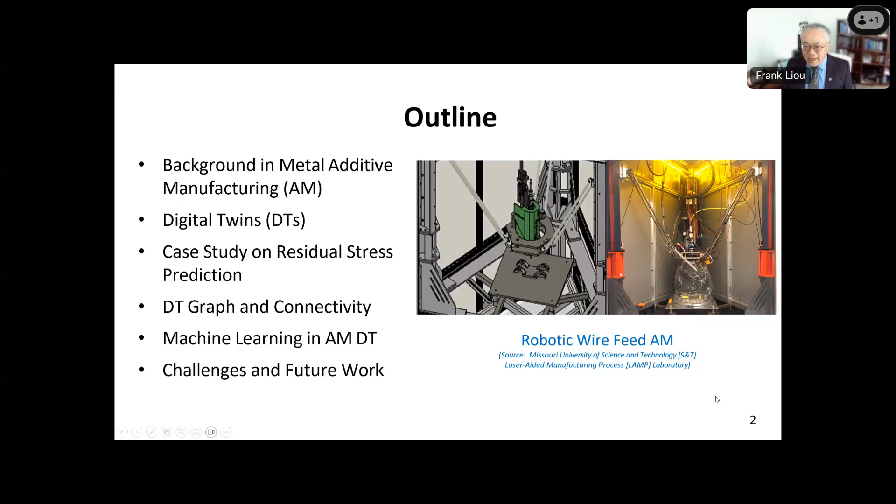By the way, in our lab we are actually building our own system. What you're seeing here is a robotic wire feed additive manufacturing system. Our lab is also called LAMP lab, laser aided manufacturing process. The machine here is also designed and fabricated by ourselves, sponsored by the National Science Foundation. We call it advanced materials and manufacturing, additive manufacturing process.

So this is a powder-based system. We have been working on metal AM research since 1997.

We specialize in custom AM system and component design and integration, especially in hybrid system integration and process planning. For example, we're working with partners like Pine and Siemens to develop their NX additive manufacturing process, hybrid manufacturing. We also work with DMG Mori to commercialize their first DED system. And of course on repair and monitoring and controls, part characterizations, and digital twin for additive manufacturing processes, and digital factories.

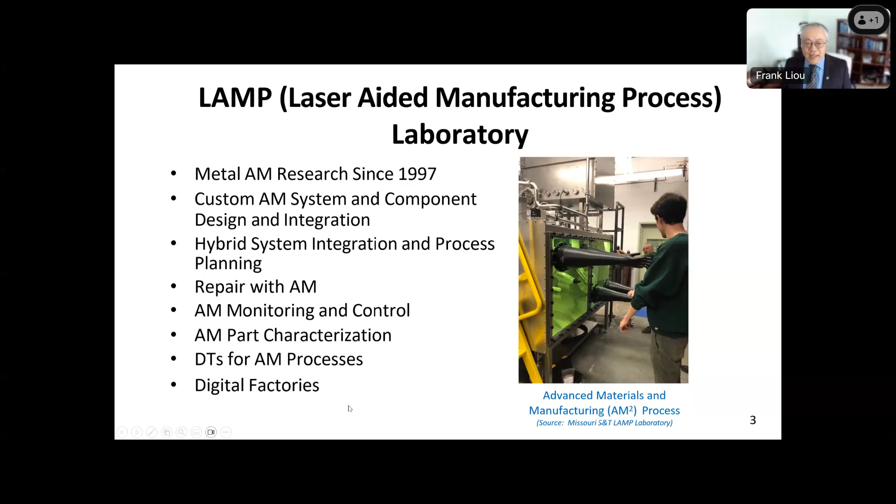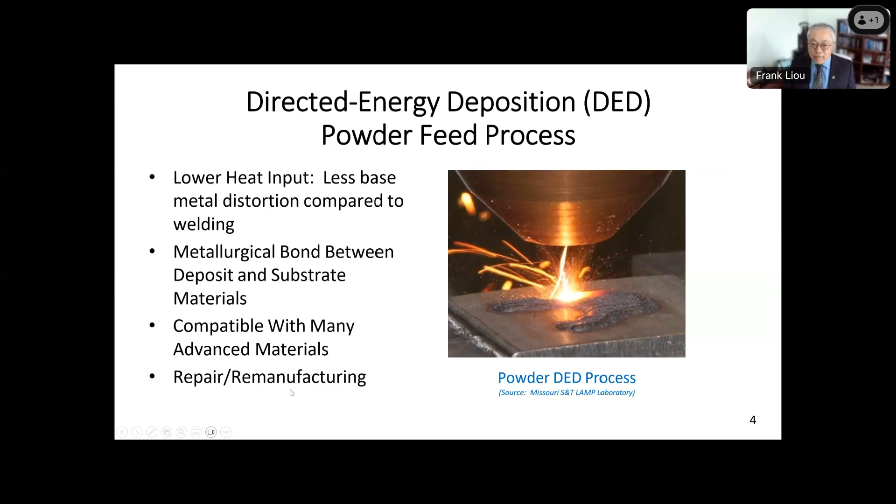The focus I'm going to talk about is more on DED, directed energy deposition powder feed system. DED's general characteristics are that it's laser based, so it has low heat input, and less base material distortion in terms of residual stress compared to welding. There's also a very good metallurgical bond between the deposit and substrate materials, and it's compatible with many advanced materials. So it's especially good in terms of repair and remanufacturing.

This was actually one of our first systems where we developed a process plan. Starting from a CAD model, it will automatically generate the tool paths for deposition and for machining. That's the hybrid process.

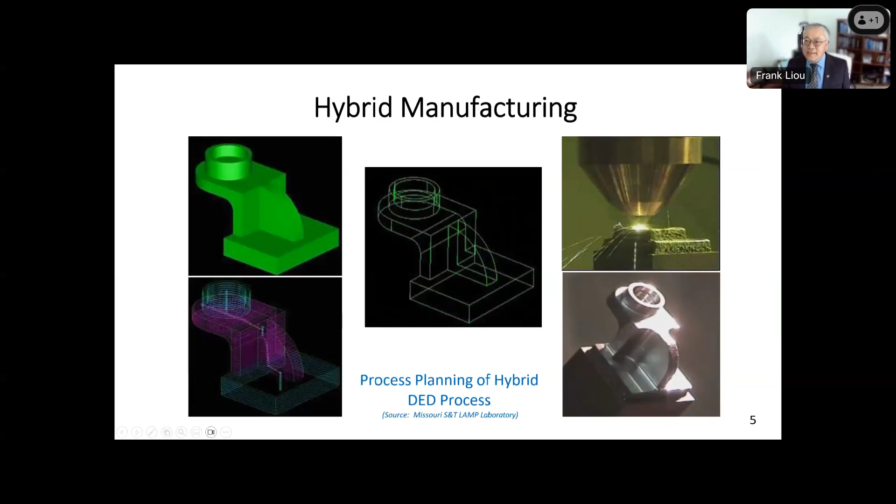Metal AM has emerged as a disruptive digital manufacturing technology. However, it still has a lot of issues. For example, in terms of geometry, for traditional manufacturing methods, you probably don't worry too much about the material composition at different locations. There are still some issues, but for metal additive, this is especially an issue.

For example, if we are trying to make a consistent microstructure, the first layer condition is very different, and could be different than the second layer, and different than the third layer, and so on. Because of that, it's kind of geometry dependent and material dependent, and then we try to avoid defects like residual stress. So there are a lot of issues.

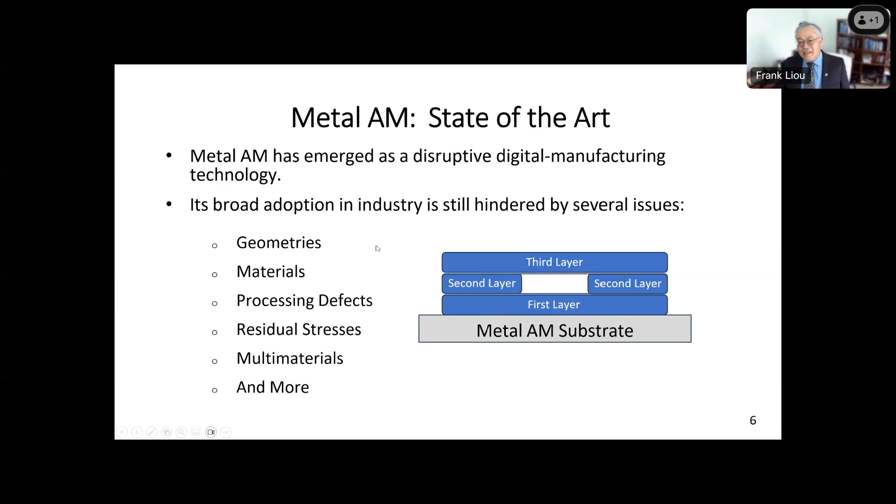The one good thing about metal additive is the DED process: you can make multi materials, for example functionally graded materials. So anyway, if it's a function of geometry, then it's not good news, because then it's very complicated. So we try to see if we can resolve these issues.

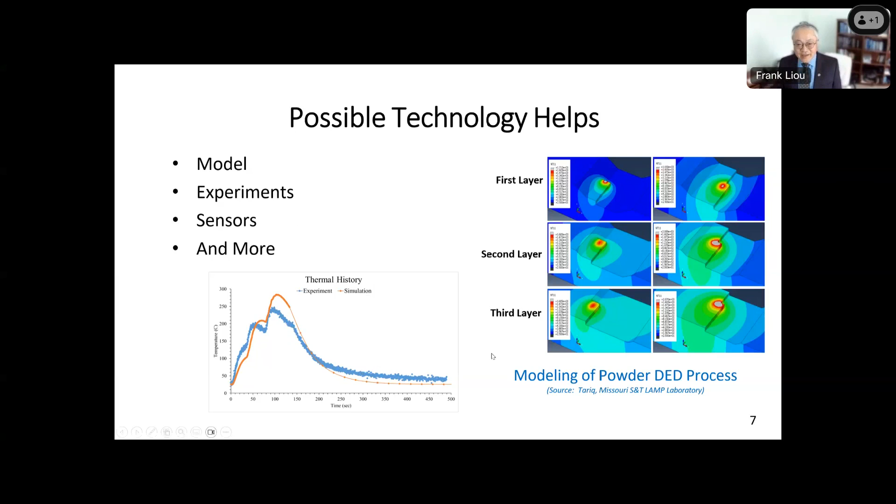Probably process modeling is the first step, trying to model what's going on. As you can see, this is just one example to show the comparison between experiment and simulation. We try to use experiments and sensors to capture whether or not the temperature history from simulation is consistent with the experiment. Because we do this quite a lot, when I first saw digital twins - since you need a model and you need sensors - I thought, hey, we actually can do a digital twin for this.

So this is some kind of snapshot of our system here. So what is a digital twin? A digital twin is a virtual representation of a process that spans its life cycle. It's not only one case of model and validate - it's updated from real-time data and history, and uses process modeling, machine learning, and reasoning to help decision making. For example, this is our AM system, and this is the model.

We probably have some kind of sensor to get the data so we can improve the model and the process. Some of the process, like microstructure, happens after fabrication, so that's offline. Even offline data, like cracks or successful parameters, can be included into the digital twin. We try to use machine learning to get the data, and this process is supposed to be continuously used to improve the system.

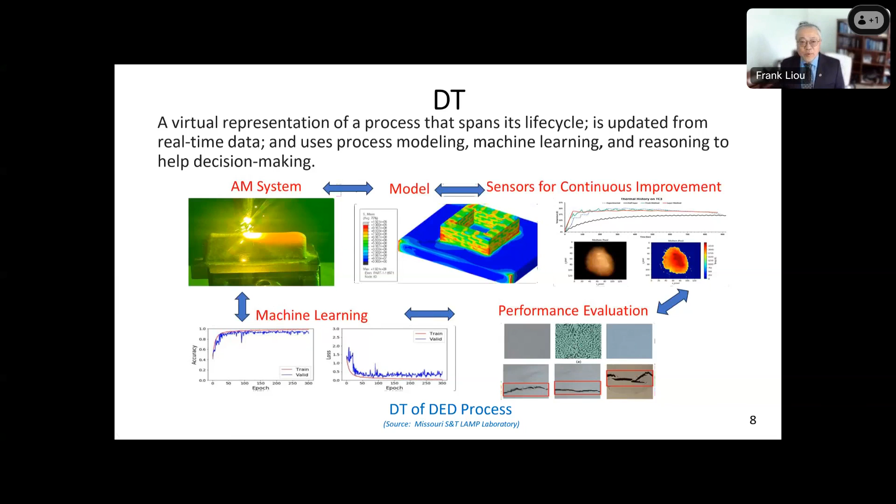So why are we using digital twins? We can use sensor data from the physical test and data from the virtual model. Those sensor and experiment data can be used to validate your model, but we try to make use of those different kinds of tests and continuously improve the system, giving insights into many critical aspects of the manufacturing process, and more importantly, getting that information quickly.

So it's a very critical tool for the most decision-making process. And if we can do that, then we can improve operational efficiency, automation of multitask, and training, validations, and the eventual goal is to achieve the so-called first-time build success.

That's why I mentioned before it could be a function of geometry. In other words, building different geometry depends on your requirements. You may have to fine-tune some of the parameters, but whenever you have a new system coming, hopefully we don't have to, or at least minimize the trial and error process, and achieve first-time success.

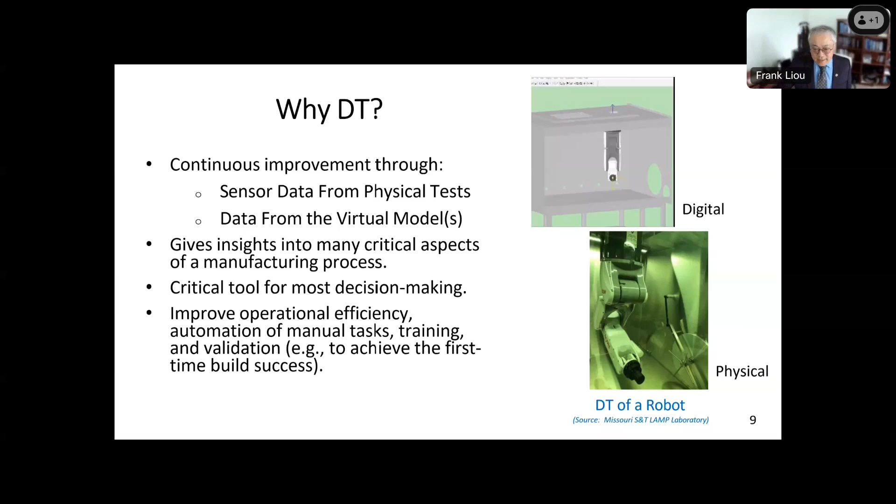I'd like to remind you that there are fundamental research gaps and future directions for digital twins, recommended by National Academies in 2024. The first recommendation is for federal agencies to launch new cross-cutting programs to advance mathematical, statistical, and computational foundations for digital twins. The second recommendation is to ensure verification, validation, and uncertainty quantification are an integral part of new digital twin programs.

This is actually from a book, but those two recommendations sometimes I feel are very important. So in our lab, this is the process controls, to give you some idea.

This is the 3D printer, the metal additive process. There's some kind of sensor, and the sensor gets the sensor data back to the control system. Normally we call that feedback control or fuzzy logic control, going into the logic controller to control the printer. However, in digital twins, there's also feed-forward control that can provide input here, and those could be from the analytical model, could be FEM model, or the integration of those - we call that a surrogate model.

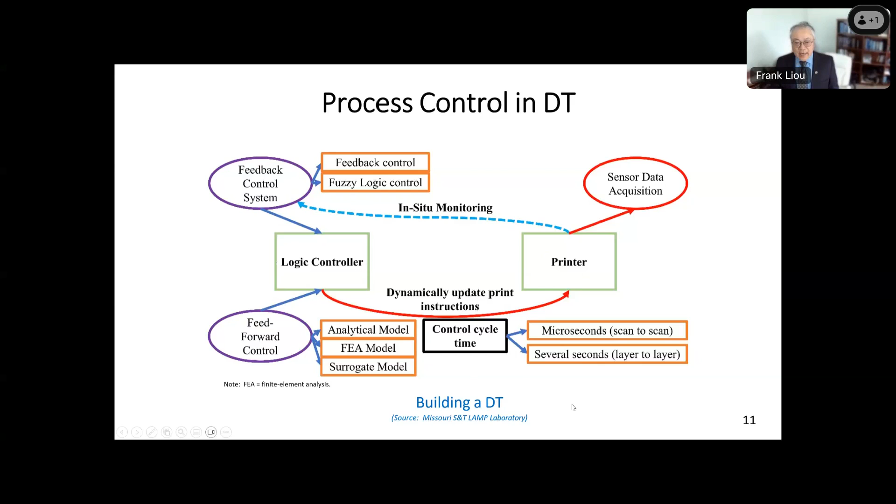If we look at the overall parameters in the DED process, for example, we have laser beam and powder beam, they interact to come up with the parts. If you look carefully, there are a lot of parameters - I just list some of those. There are 50 different process parameters. Some may be important, some may be minor, but they could all influence the final product quality. It's actually a very complicated system.

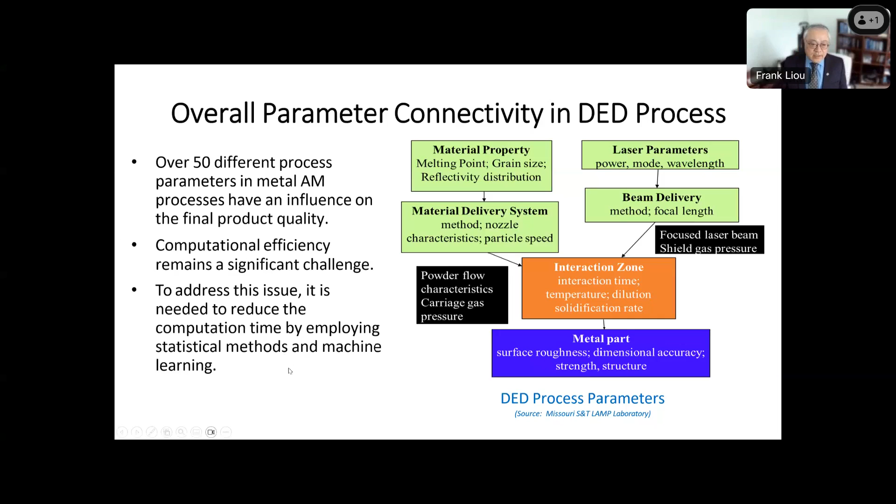So then we try to do some modeling to understand the process. However, computational efficiency is still a significant challenge because there are so many parameters. In general, the computation is kind of slow. To address these issues, we need to reduce computational time by using other different methods like machine learning, which we just talked about. In terms of the model, you can see why it's so complicated - this is for the metal AM modeling process. Before the solidification, there are powder dynamics.

Okay, we want to know what kind of powder and what kind of shield gas, and then how the powder is going to behave, whether or not they can focus into the melt pool, and laser beam interactions with the powder, and melt pool thermal fluid, and then during the solidification, the microstructure and phase transformations, and then after it's solidified, what are the residual stress and the distortion there? So each one of them could be some effort to model it.

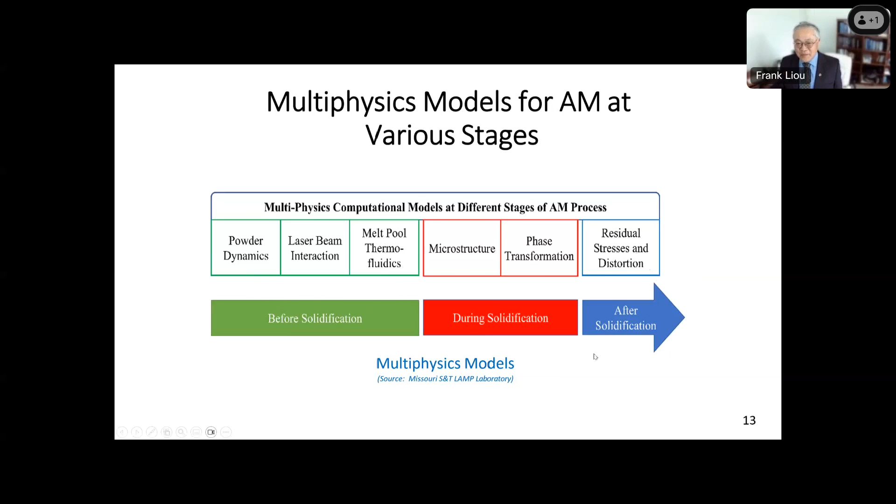So I'm going to focus on the residual stress, because during the deposition process, there is a tensile stress condition that can affect material performance, and also there is a compressive residual stress once it's cooled down. The bad news is they don't normally cancel each other out. Okay, so this is the sample I've shown here. This is just a flat plate, but we just deposit a little bit here, and you can kind of see it's distorted.

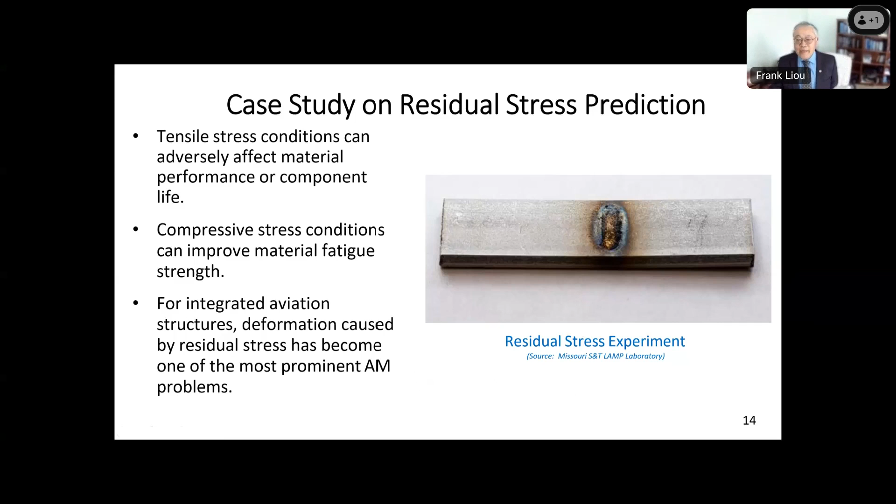If this is the case, then whenever we are trying to repair something or even deposit new parts, it's going to distort. So it depends on the application. In some cases, this is probably a big problem, to have the residual stress. That's why I use this as an example to talk about that. So we try to overcome these issues, but before we overcome it, we need to understand how that works. Let me give you one example.

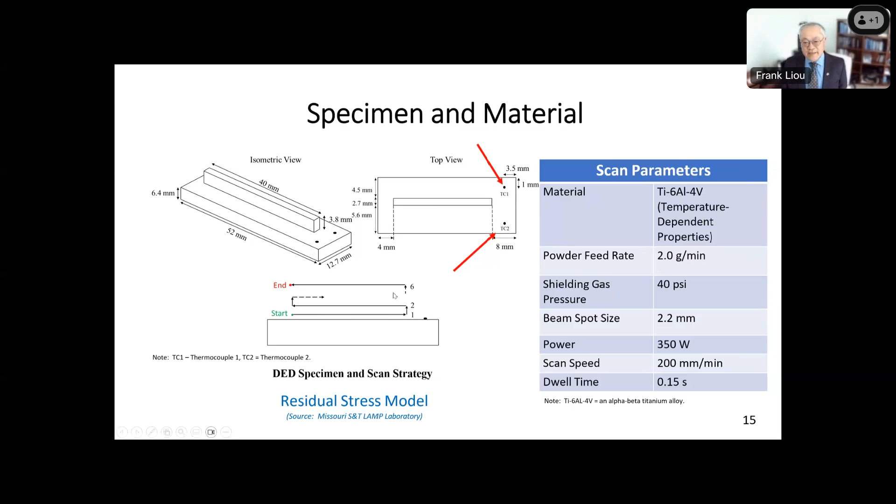So this is actually a part that we use for testing, to validate our model. This is a very simple case, just a thin wall here. And we put two thermocouples just to validate. So we try to model the entire deposition process, including those 2 points, and then see how good the model compares with experiments. In this process, we feel that the temperature is probably the most important, or at least something that we can measure. And then we deposit, in total only 6 layers, and then we see what happens.

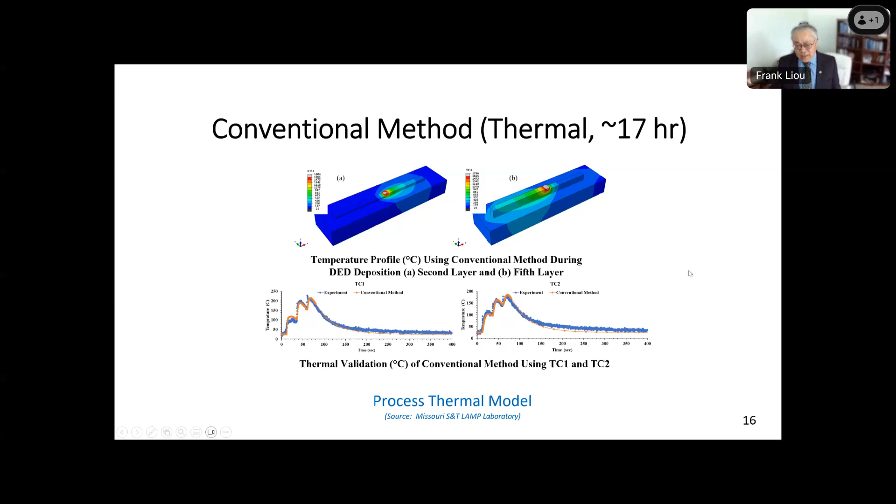So we use a conventional finite element model. And I think we probably have enough measures. So you can see it compares the experiments with the conventional method. The model with experiment fits very well. The major problem is it takes about 17 hours, on the student's computer. So because of that, we try to see if there is a way that we can reduce the computational time. On the most left-hand side is the one I just showed you, the 17 hours. And we found out there's another method called the chunk method.

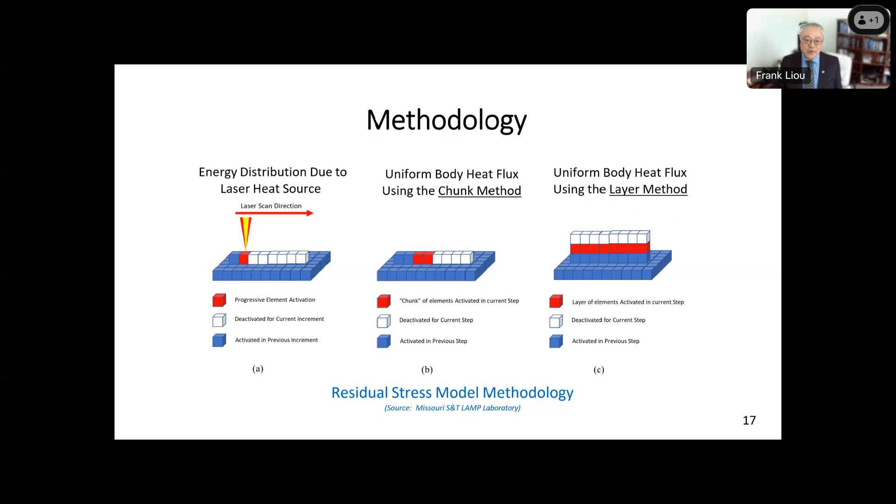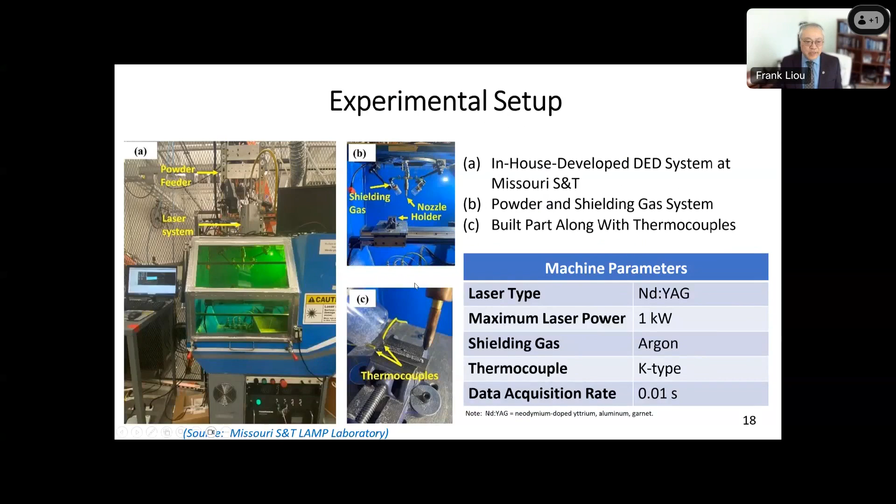The chunk method is an approach where, for example, we put 2 elements together and we call it a chunk. So in this case, we have this one chunk. We call this the chunk method. And then over here we have a so-called layer method, where we treat one layer as one element. So this is kind of an approximation, yes, we know, but we try to see how well we can accelerate, whether or not we can reduce the computational time. And then we also have experiments and thermocouples to measure it. We also have an optical camera to look at that.

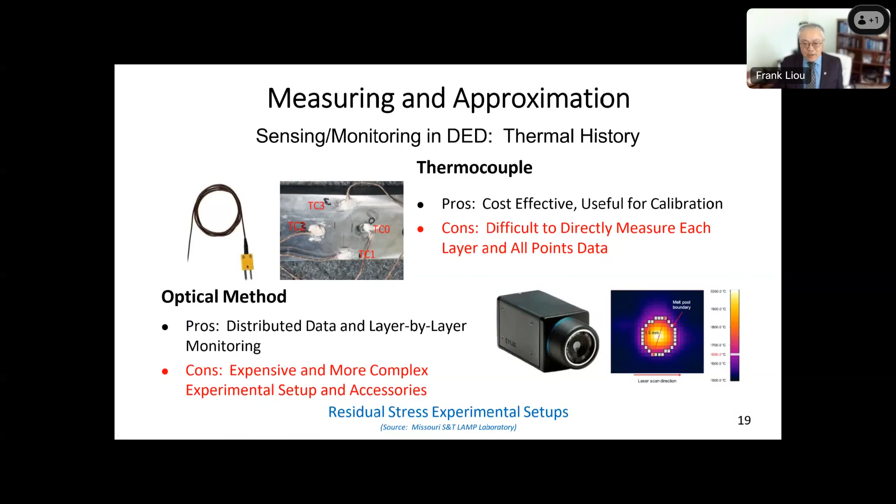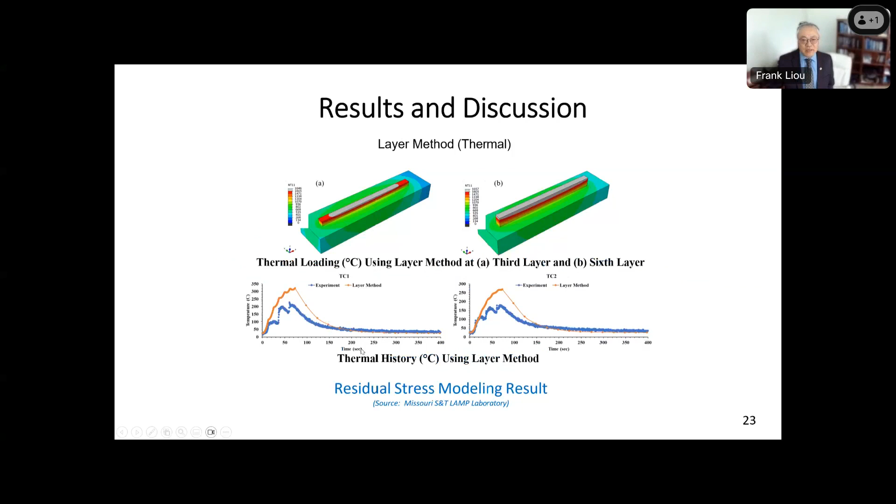And then this is the layer method. Layer method means we treat the whole layer as one element. And you can see this is even more off; you probably can only get some kind of general trends with the layer method. So this is the summary of the results. In terms of computational time, this is in minutes.

So for the traditional FEA methods, it's about 1,000 minutes. That's about 17 hours, as I mentioned before. And then this is the chunk method over here, and this is the layer method. So the layer method is 29 minutes. But as you can expect from the thermocouple, the layer method has the most errors, as expected.

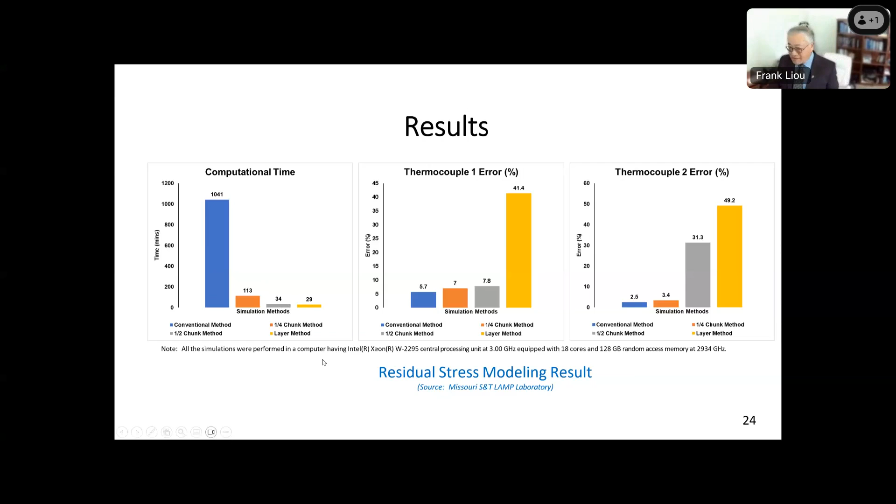Now the question is, let's say 30 minutes or so, this is supposed to be the fastest we can calculate for this case. So is 30 minutes acceptable? It depends on what you want to do. But in general, we think this is probably not sufficient, because this is a very simple case. What happens if it's a more complicated case? It would probably still take a few hours to compute.

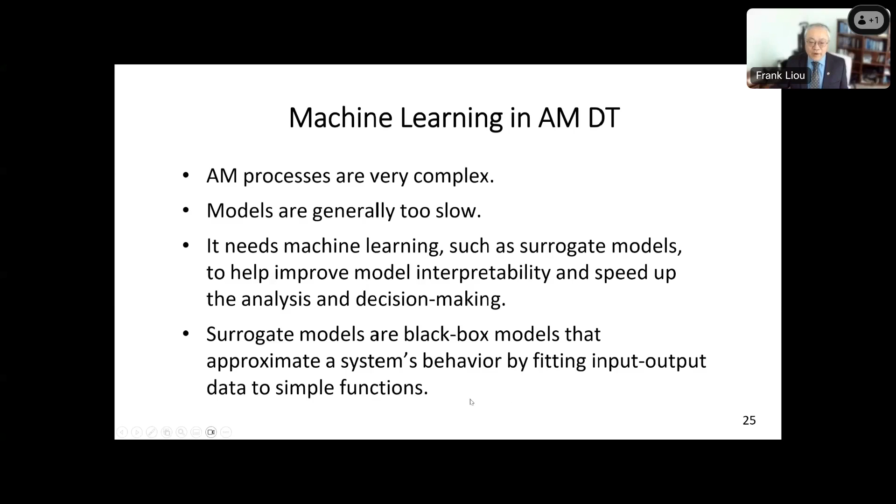So we started thinking about using machine learning here. Because those AM processes are very complicated, the model is too slow. So we try to develop a surrogate model to help. So what is a surrogate model? It's a black box model that approximates the system's behavior by fitting the input-output data to simple functions. And you could also use neural networks to get some more details there.

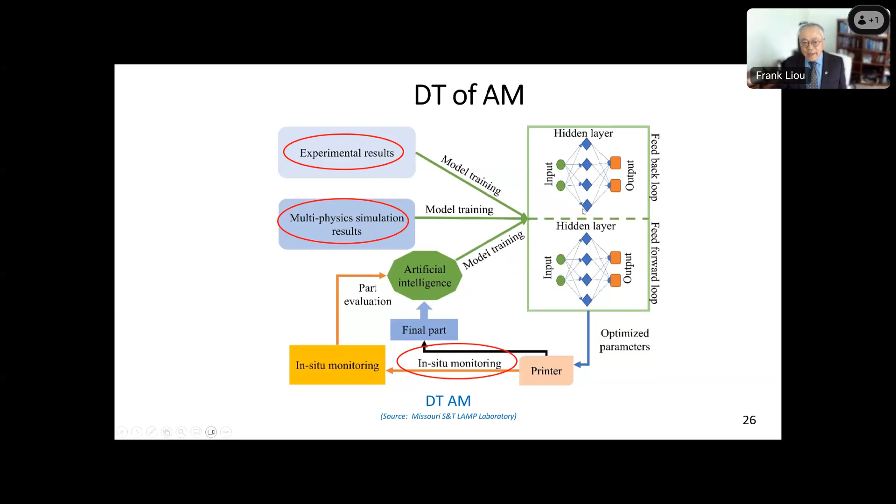So it's basically something like this. The whole thing is a digital twin system, but here this is the neural network. We feed back the data from the experiments and data from the simulations as training data into the system, and as feedback we can continue to improve the system. So this is when we developed the surrogate model.

So from the experimental data and from the modeling, we gathered those data and used them to train the surrogate models. We used actually 4 different types of neural networks, XGBoost, for example. And then we try to predict what's going on; we try to predict the temperature.

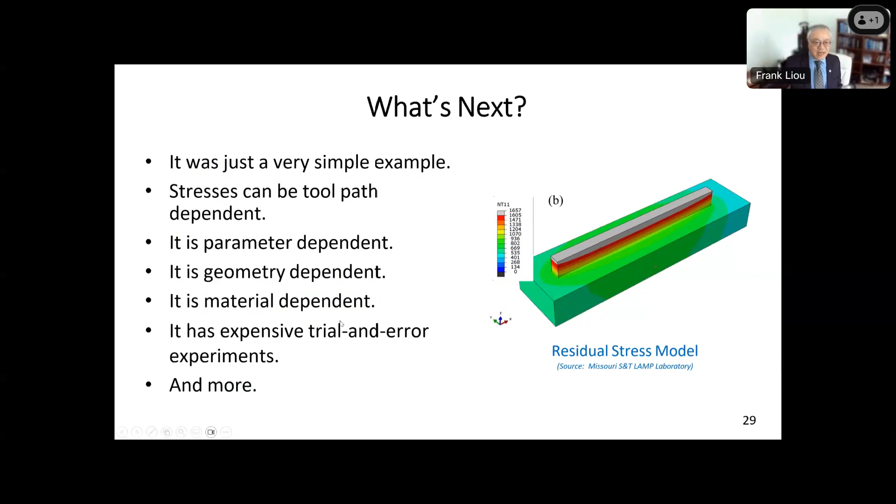So what's next? Because this is a very simple example. The stress could be toolpath dependent. It could also be parameter dependent, with a lot of parameters there. So we try to see how we go from here.

If we look at the applications in metal AM, a lot of people are interested in the microstructures and the mechanical properties and strengths, for example, tensile, fatigue, hardness, toughness, ductility. Repair and remanufacturing have their own requirements as well. And some of the digital materials, like functionally graded materials and multi-materials. So there are a lot of possible applications there.

So our approach is trying to dig into details. For example, people are interested in microstructure and mechanical properties. If that's the case, we probably need to look at some of the defect sources and, as I mentioned, dig into the details. For example, some of the parameters may be related to the equipment: issues with the laser source, printing chamber conditions, faulty coating delivery systems, or improper base plate dimensions. For example, maybe the base plate is too small, something like that.

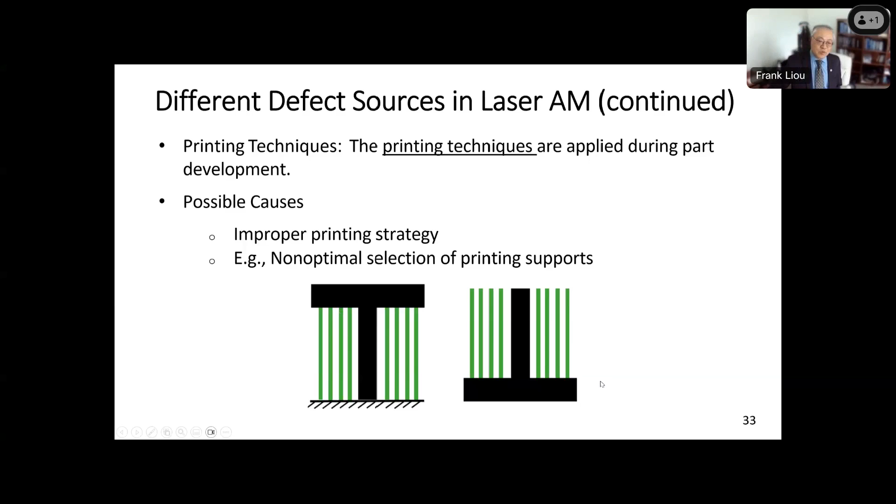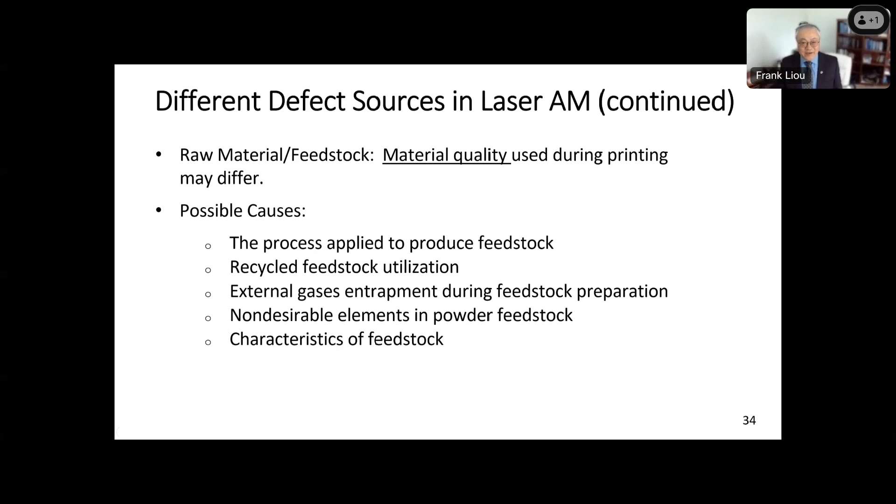And then this temperature, and as a result the cooling rate, is going to affect your microstructure. For example, if the cooling rate is high, maybe your grain size is going to be small. And your grain size is going to impact your strength, and so on. So we need this digital twin graph and the connectivities to link all the parameters of our interest together. And then from the experiments and from the simulation, we'll be able to find out the weight for different connectivities.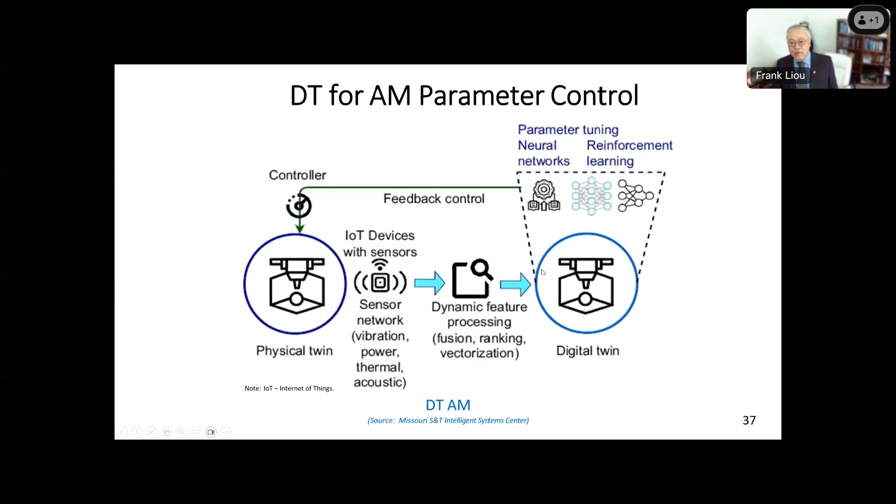So this is kind of a schematic of the system. This is the physical twin and this is the digital twin here. Physical twin means the experimental data. You probably have sensors there, so there will be sensor data coming, and after processing the data, you use that to train your digital twin.

And when we talk about the sensors here, we can also look into the sensor signatures. For example, in the melt pool, some of the melt pool parameters, the shape, temperature fields are important. Maybe there are more than that. Layer printing, shape, temperature fields, distortions, and so on, and powder streams.

So we try to identify some of the parameters we may be interested in getting, and then we will try to see if there are any sensors that can actually capture those. Some of them may be difficult, but it's okay, we do our best. For example, some people use an IR camera over here to look at the temperature of every point.

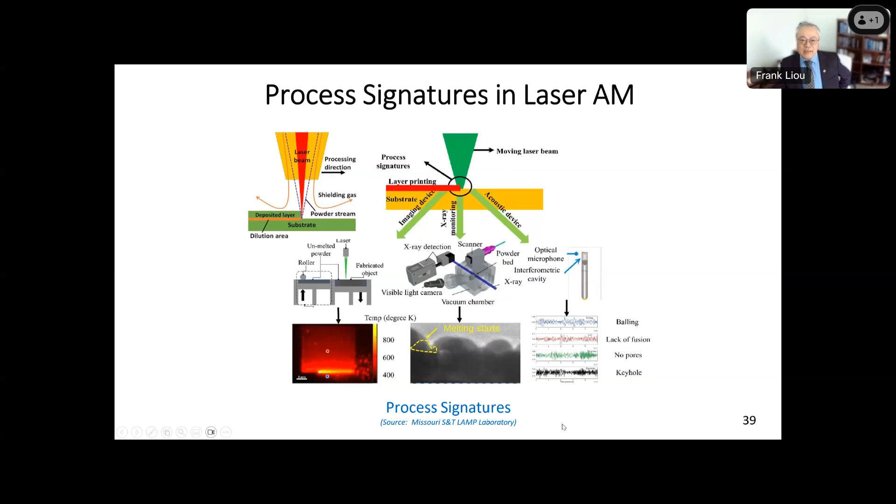And some researchers try to use X-ray monitoring, so during processing you will be able to see how the laser interacts with the powders. And if you have acoustic sensors, just from the sounds, you probably can identify that balling happened or lack of fusion happened, something like that. In other words, we try to connect those sensors with the signatures we just identified.

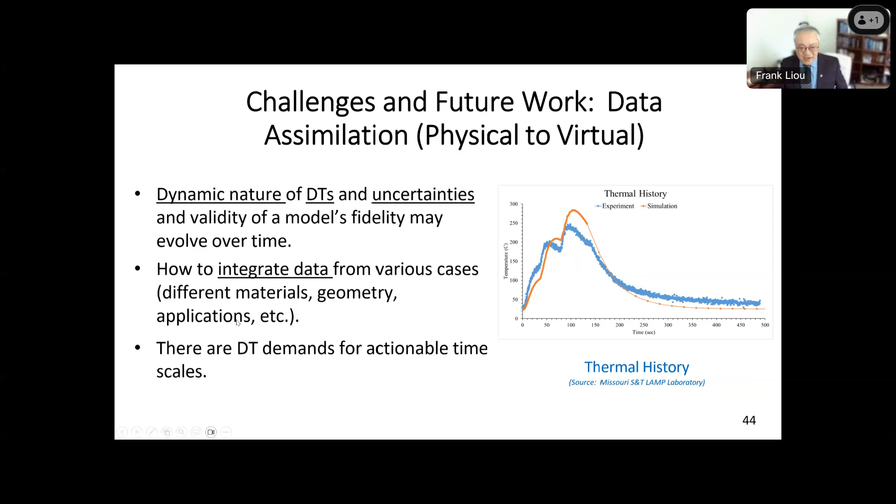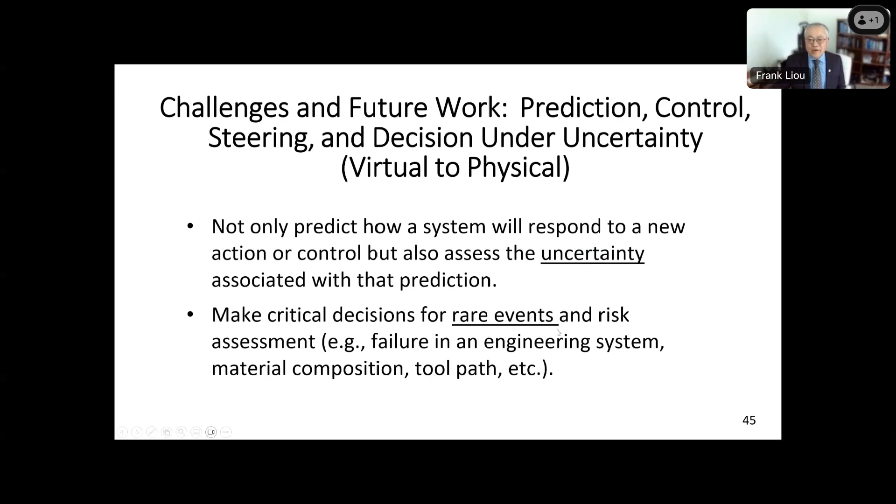The other one is also about uncertainties, especially for rare events, because sometimes we try to see what might fail. Most of our data, our experiments or models, are trying to model success. But those failure cases could be rare events. So those are also a challenge.

So in conclusion, as a summary, I think additive manufacturing is a disruptive digital manufacturing technology. The concepts for developing digital twins for metal AM are summarized. A digital twin can learn from the past and resolve process issues quickly, and can be a key to AM certification for new parts. That's very important. As I mentioned, it could be geometry dependent, but if we have a good digital twin, we might be able to certify a new part. But there are still a lot of challenges to overcome. So that's my presentation, and thank you for your attention.

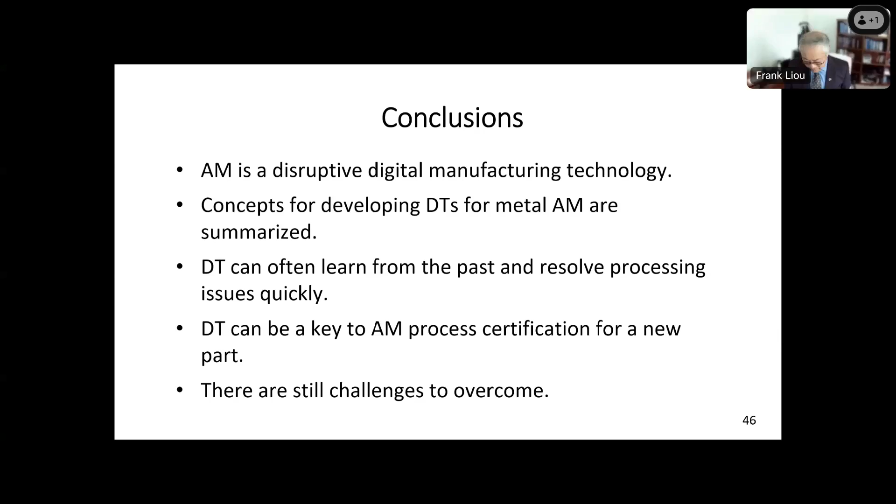Great, thank you. This is from a little bit earlier on in the slides: when CI/CD is used, will every part be slightly different until the process is stable with no additional changes necessary?

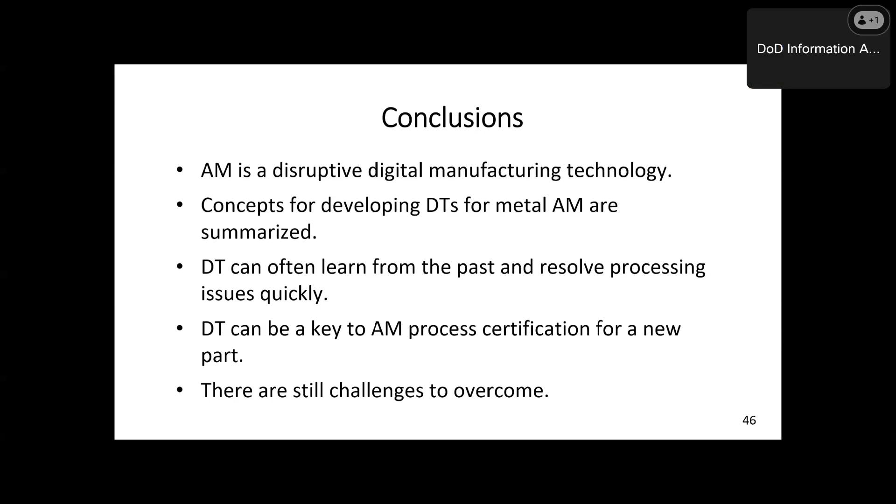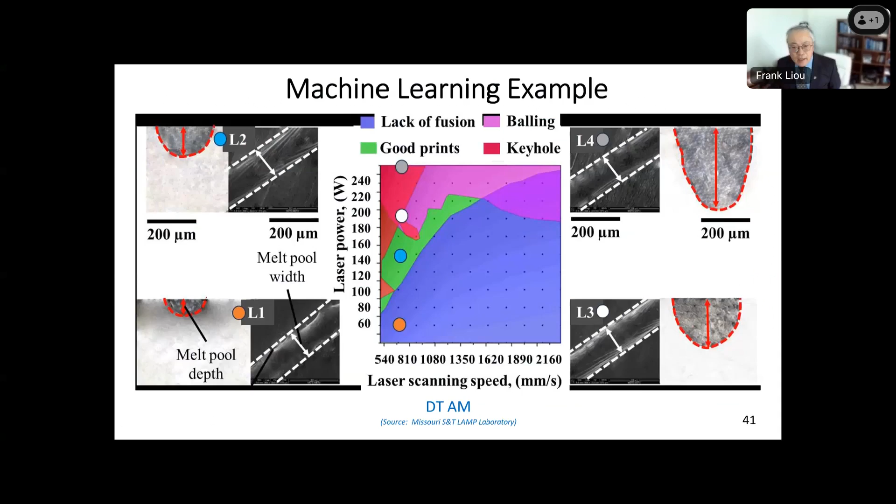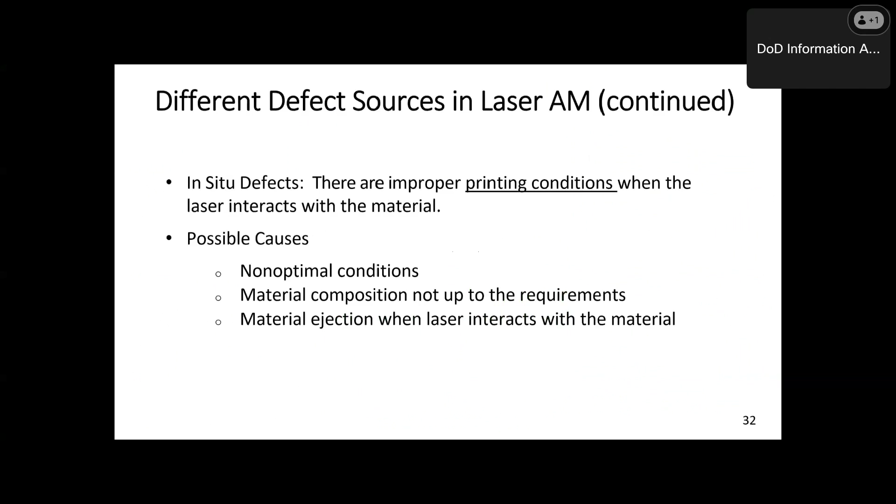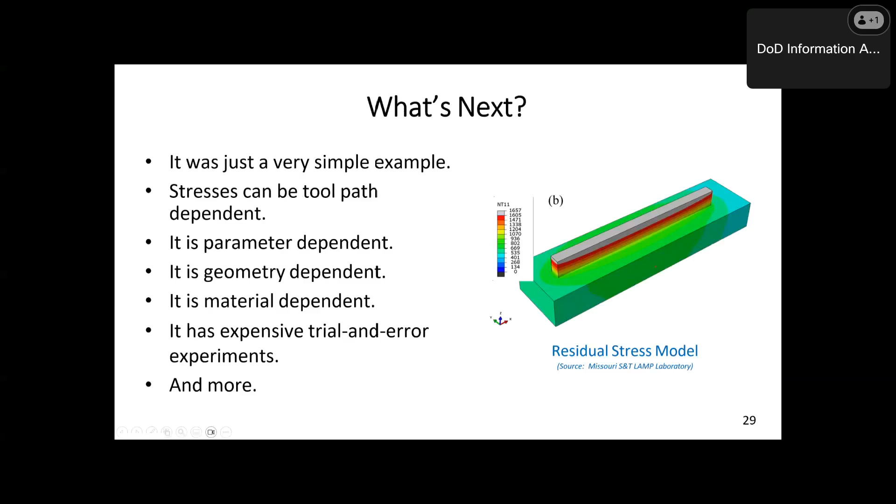Oh, continuous integration / continuous deployment. Can you phrase the question again? So when you're using continuous integration or continuous deployment, when that's used, will every part be slightly different until the process is stable with no additional changes necessary?

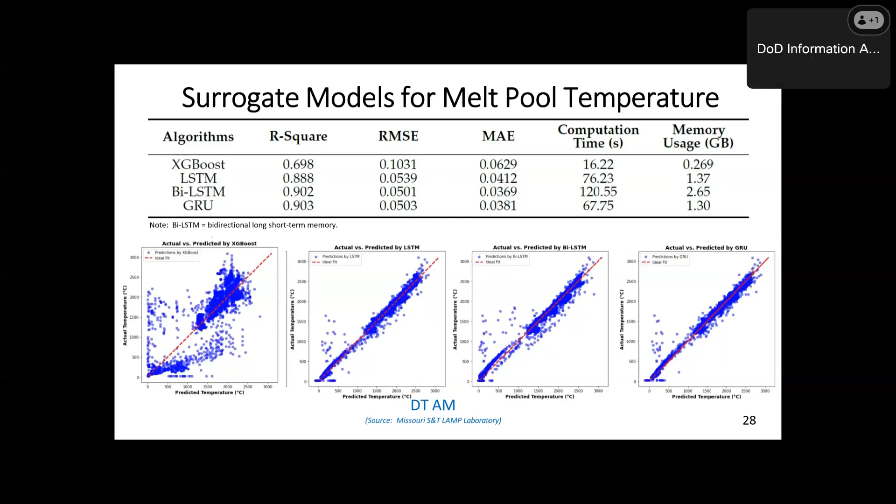I think probably, yeah, that's a good question, and it depends. I think when the computational power or time is limited, we probably focus on some focus part. That may be the quickest way.

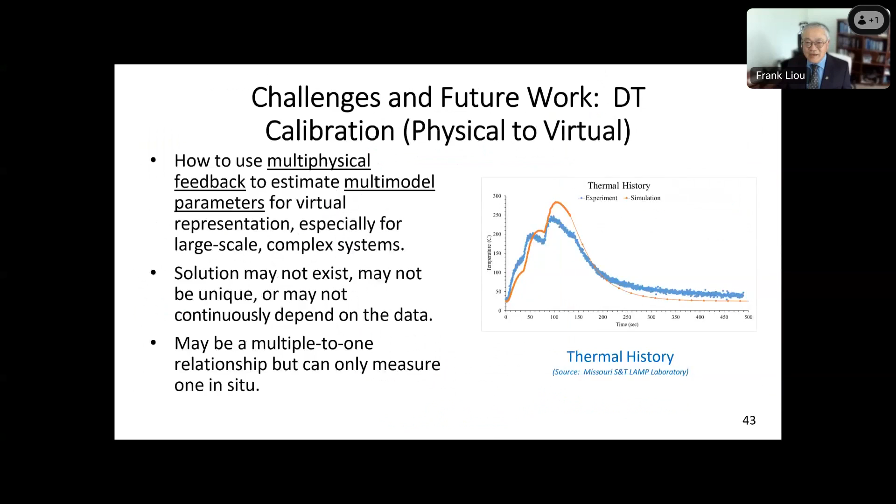And if we are trying, for example, to do more with the machine, if we try to do something more like transfer learning for different materials or different processes, then the goal would be to predict different parts from different processes, but that might take a while to do. So if you have a process that mainly has a part family with very similar parts, even if you talk about one part that's even faster, it's possible that you can probably train a part family very quickly.

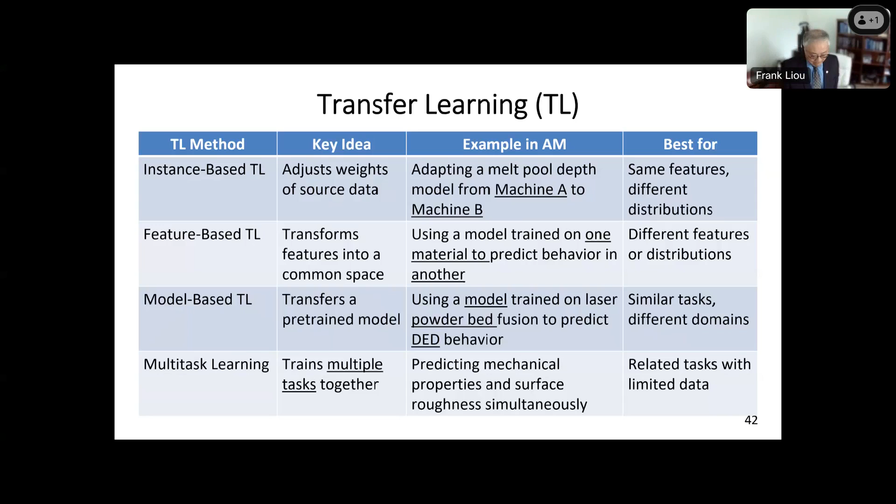Thanks. All right, next question. How representative of the final part does the experimental data need to be for the digital twin to be accurate?

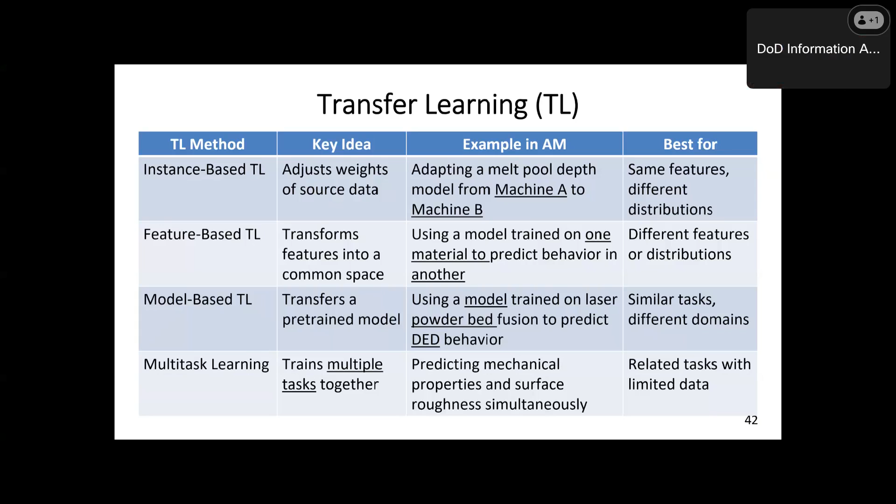Yes, that's a good question also. We hope that, that's why we talk about in some of the process, the data will have to be screened, so that bad data will not get into the process. I think this is a very important task. Whenever you have the sensor data come in, you might happen to have a batch of material which is not good, and you will not know. I do not have a solution for something like that, but we probably try to make sure the data looks reasonable. If not, we need to find out why it's not consistent.

Great, this is a two-part question. This gentleman is asking, where does all the digital twin information go and how is it organized? And are there any kinds of data architectures you're aware of in the DoD that do or could manage this?

Yeah, digital twin is still very, very young, and part of the reason is because it takes time. As you can see, at this moment we are still trying to see what parameters are actually critical, and I think that's the first step. Once you identify those, then there should be some way to actually store that data. I think this process is actually very important, being able to decide what data to keep and what data not to keep. Those are actually very important.

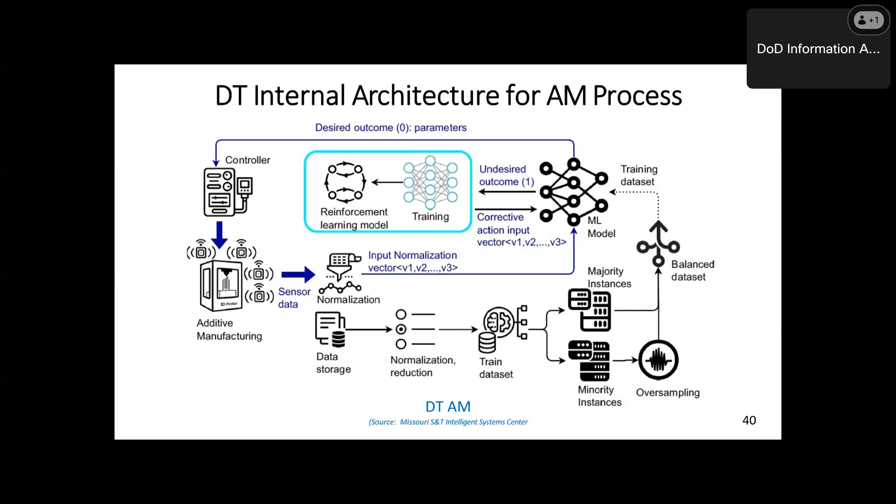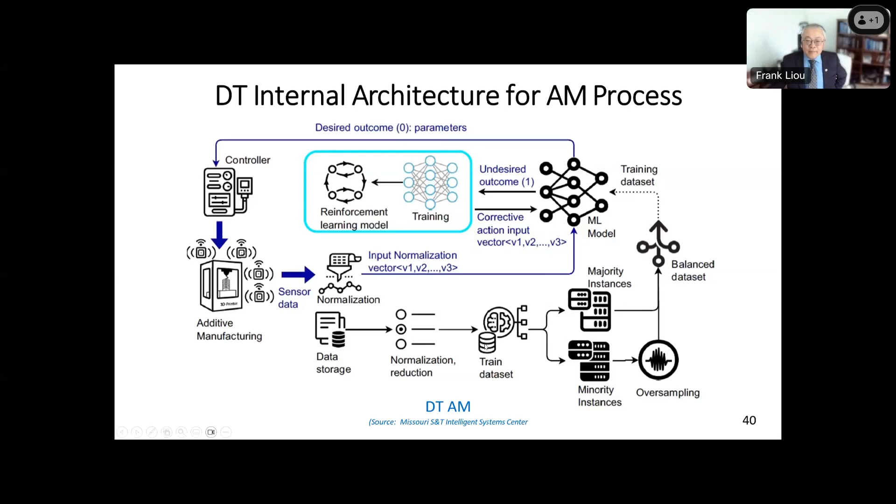Okay, next question. Let's see. Given that the surrogate model is a black box, how do you know which parameters or variables of the physics model to tune when calibrating the digital twin? Okay, so which parameters or variables? Here you are talking about the, okay.

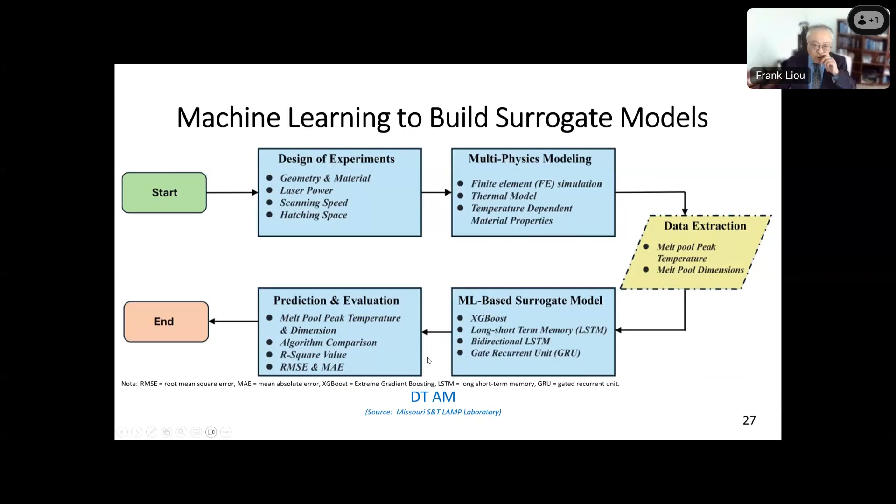Yeah, here's what we normally have. In this particular case, we have a goal, which is we try to measure the temperature. In this case, this is easier because we already have a goal. But I think for every parameter, we need to identify some of these goals. As you can see, those are basically the applications, I call it applications, but those are the goals.

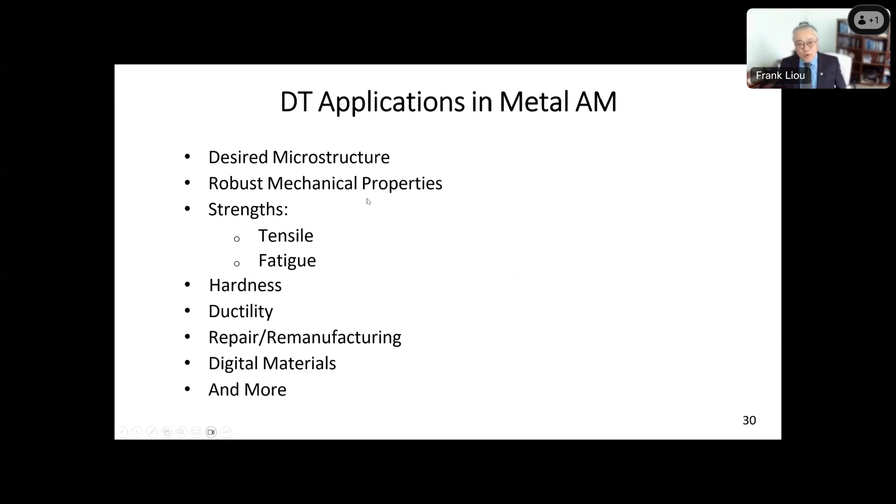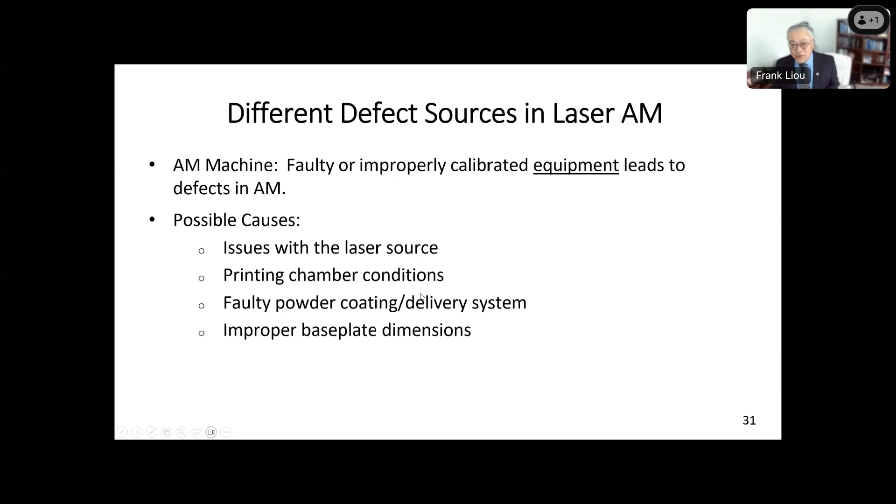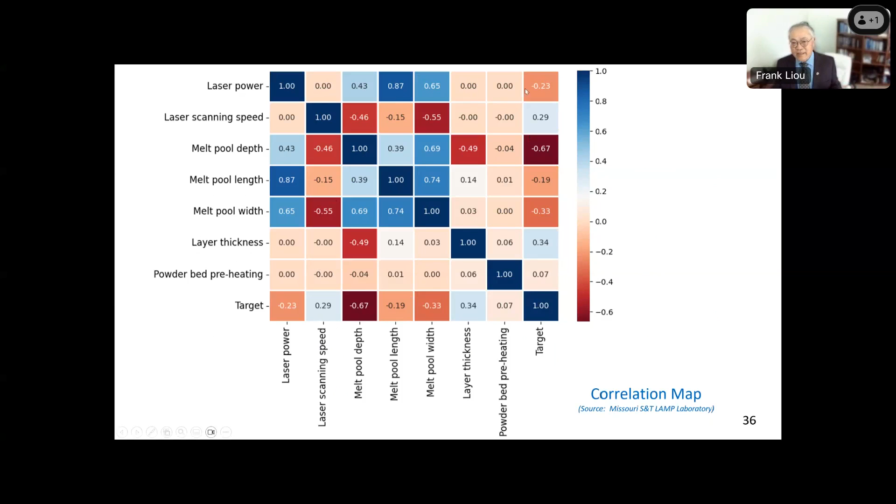Once you identify, for example, the microstructure we talk about, we need to dig into it to see what might be the possible parameters we are looking at. Even if you are not sure, the next step is we probably need to form this and then run some experiments, so you connect everything together and try to find out from model and from experiments. Then we can identify, okay, some parameters are closely related and some are not. If they are not, we can ignore them, for example this one is not that important, so we can just ignore that parameter.

Thank you. Next question is, what simulation tool or language are you using for your DT model? Yeah, that's also a good question.

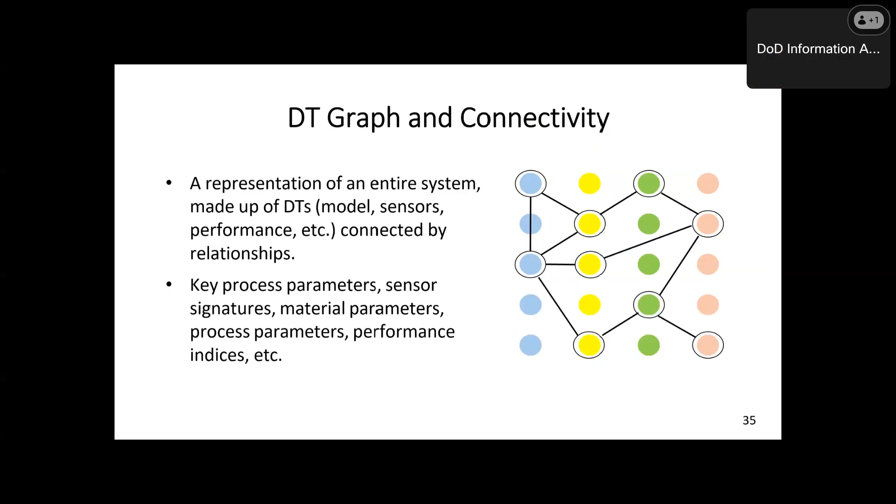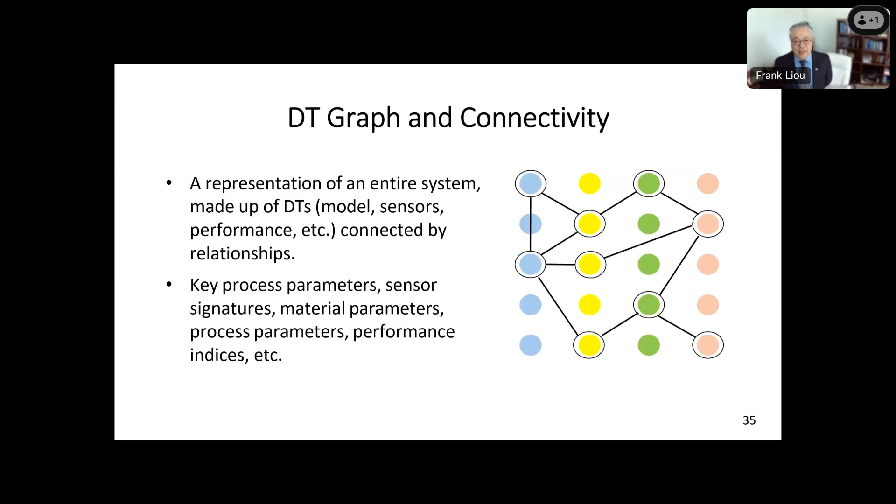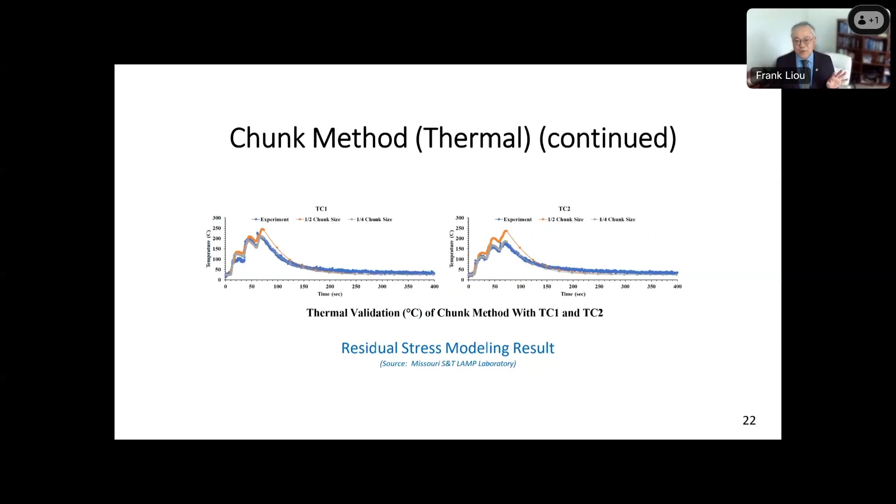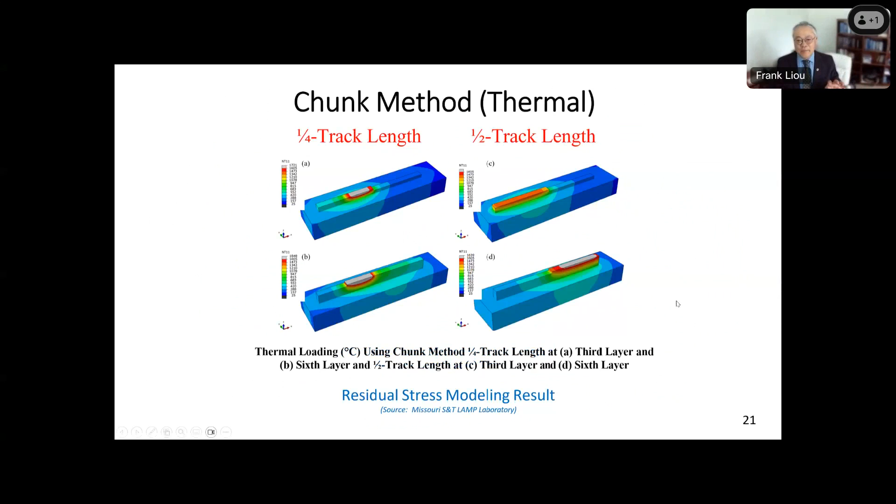We have a couple of projects going on. In one project we just use standard finite element analysis. Another one, we work with another university, they develop their own modeling tool, and the advantage is it's much faster. So depends on the case, in this one we try to use the standard software to do the model. Part of the reason we use this is we try to use the model to get relatively accurate data, and then use that to train our surrogate model.

But it depends on the different scenario and what you need. In this case, the temperature is important, but in some cases you may not really need to use FEA. Maybe some kind of analytical model may be sufficient, and that will be much faster.

Thank you. Okay, next one is, do you recommend a post-processing heat treatment for enhancement of mechanical properties or alteration of grain structure for a wire feed laser AM application?

It depends on your application, but from industry, I think that's kind of standard. A lot of industries like to suggest having heat treatments so they can get a consistent microstructure. However, it depends. From my experience, I feel that in some cases you don't really need heat treatment, but it's a standard practice, and they can get more consistent results. I think that's what they are looking for.

Great, okay, I think we'll make this our last question. Let's see, okay, so the last question will be, does this approach work with AM thermoplastics as well, since they tend to have anisotropic properties?